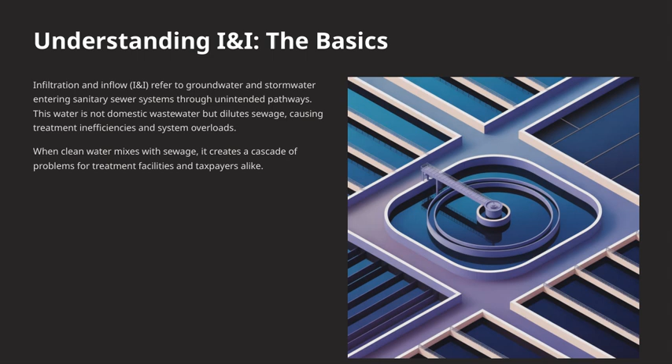Understanding these basic concepts helps us grasp the bigger picture of why managing I&I is crucial for maintaining effective, cost-efficient wastewater treatment and protecting our communities.

Let's take a closer look at the difference between infiltration and inflow, as understanding these is key to managing sewer system issues. Infiltration happens when groundwater seeps into the sewer pipes, usually through cracks, broken joints, or defective manholes. This process occurs continuously, so it's a slow and steady flow of water coming from underground sources.

On the other hand, inflow is quite different. It involves stormwater entering the sewer system through direct connections like sump pumps, roof drains, or uncapped cleanouts. Inflow tends to happen during rain events, leading to event-driven spikes in flow that are rapid and high in volume, and these usually come from surface water sources.

Both infiltration and inflow can significantly increase sewer flow, but they differ in their sources, flow patterns, and how we detect them. Recognizing these differences helps us identify the right solutions to keep our sewer systems functioning efficiently.

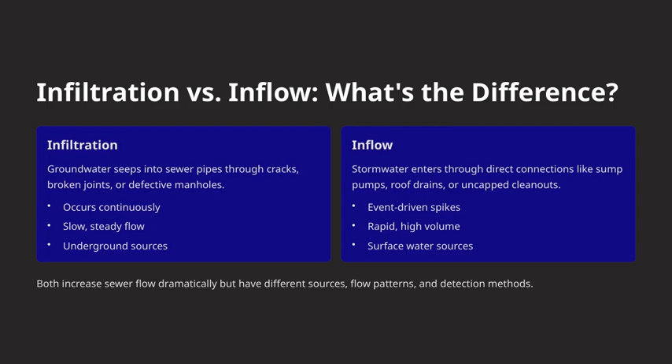So let's talk about how I&I, or inflow and infiltration, actually enters sewer systems. One of the main pathways is through infiltration, which happens when there are cracks in pipes, offset joints, damaged manholes, or deteriorated cleanouts. These are all points where groundwater or surface water can seep into the sewer system, especially if the pipes are old or poorly maintained.

Then there's direct connection I want to highlight. Sometimes, sump pumps or roof drains are illegally tied into the sanitary sewer. These connections aren't meant to be there, and they allow stormwater or groundwater to flow directly into the system, which can cause serious problems down the line.

Lastly, stormwater intrusion occurs through yard drains and downspouts that channel rainfall into the sewer system. Instead of going into the ground or proper stormwater facilities, all that rainwater gets funneled into the sewer, increasing flow and sometimes overwhelming the system.

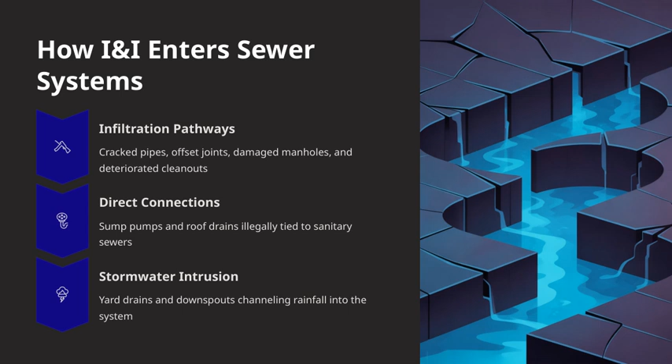Understanding these pathways is crucial because they contribute to system overloads and can lead to issues like overflows or backups. This is why identifying and managing these entry points is so important for maintaining a healthy, efficient sewer system.

Let's talk about why I&I really matters in our wastewater systems. First, treatment inefficiency. When there's too much I&I, it dilutes the sewage, which means the biological treatment processes become less effective. Essentially, the pollutant levels drop below the critical point needed for proper breakdown, making treatment less efficient overall.

Next, system overload is a big concern. Excess I&I can cause sewer pipes and treatment plants to go beyond their designed capacity. This can lead to backups, overflows, and even environmental contamination, which are serious issues for both public health and our ecosystems. And finally, rising costs.

When stormwater and I&I enter the system unnecessarily, it forces us to pump, process, and disinfect a lot of water that shouldn't be there in the first place. This extra work significantly increases treatment costs, putting a strain on resources that could be better used elsewhere.

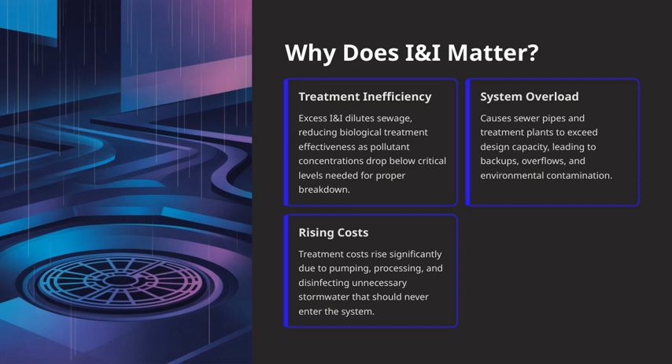So, managing I&I isn't just about system maintenance. It directly impacts efficiency, environmental safety, and costs. That's why it's such a crucial part of our overall strategy.

Let's talk about the real-world impact of sanitary sewer overflows, or SSOs. When heavy rains hit, they cause inflow spikes that can quickly overwhelm even the most well-maintained systems, often within just a few hours. The consequences of these overflows are quite serious.

SSOs release untreated sewage directly into streets, parks, and waterways, which not only creates a mess, but also poses health risks. These pathogens can spread through communities, leading to disease outbreaks. Moreover, our aquatic ecosystems suffer from the toxic loads introduced during these events, harming wildlife and water quality.

The economic impact is also significant. Beach closures and fishing bans hurt local businesses and communities that depend on tourism and recreation.

As an example, many municipalities report that between 60 to 80% of their SSOs are directly linked to inflow and infiltration, what we call I&I, especially during storm events. This highlights how critical it is to manage inflow properly to prevent these damaging overflows.

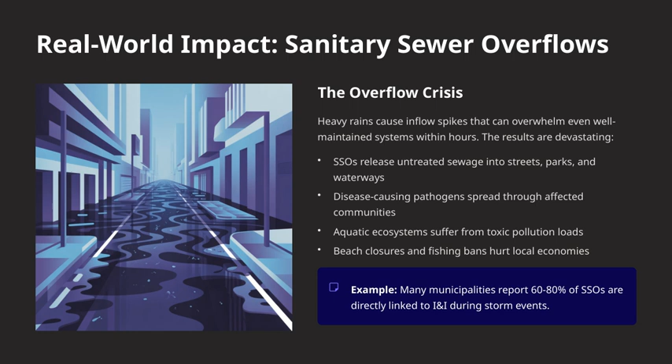Let's take a closer look at some common entry points for inflow and infiltration in our communities. First, deteriorated manholes are a significant issue. When covers become loose and walls crack, they allow large amounts of stormwater to enter the sewer system, especially during heavy rains. Next, illegal sump pumps are another problem. These pumps often divert groundwater directly into sanitary sewers during wet weather, bypassing the intended stormwater management.

Then we have roof drain connections. Sometimes, downspouts are connected to sanitary lines instead of proper storm drains, which can overload the system during storms. Additionally, aging infrastructure plays a major role. Pipes with offset joints or broken sections that are past their service life create gaps where water can seep in.

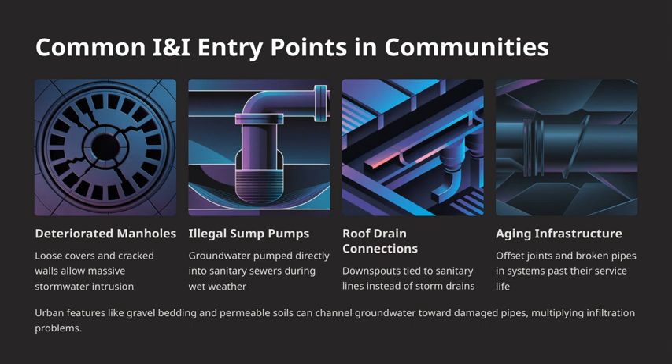It's also important to note that urban features like gravel bedding and permeable soils can actually guide groundwater toward these damaged pipes, increasing infiltration issues. All these factors contribute to the overall stress on our sewer systems and highlight the importance of maintenance and proper infrastructure planning.

Now, let's look at how we can effectively detect and reduce inflow and infiltration, or I&I, in our sewer systems. First, we need to identify the problem areas. Flow monitoring is a key tool here. It helps us pinpoint those sewer sections that see abnormal wet weather increases, indicating where I&I might be entering the system. Next, we move on to field testing. Smoke testing is great for revealing illegal inflow connections, like sump pumps or roof drains that are improperly connected, and dye testing allows us to trace specific sources of inflow directly back to their origins.

Once we've identified trouble spots, we conduct infrastructure inspections. Using CCTV cameras, we can locate pipe defects, cracks, and structural failures that could be contributing to I&I. Then, it's time for repairs. Sealing cracks, replacing damaged pipe sections, capping cleanouts, and disconnecting stormwater drains are all essential steps to reduce inflow and infiltration.

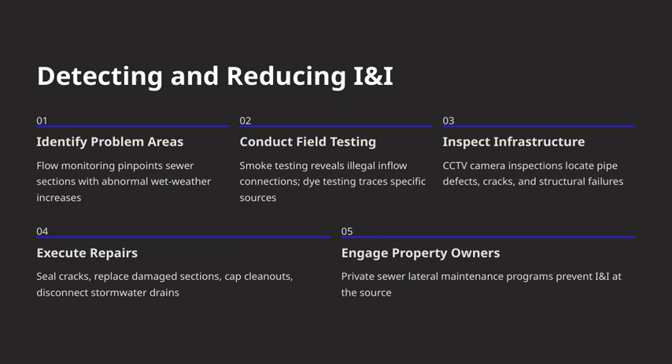Finally, engaging property owners plays a vital role. Private sewer lateral maintenance programs help prevent I&I at its source by encouraging property owners to keep their connections in good condition. Together, these steps form a comprehensive approach to managing I&I effectively and ensuring our sewer systems operate efficiently.

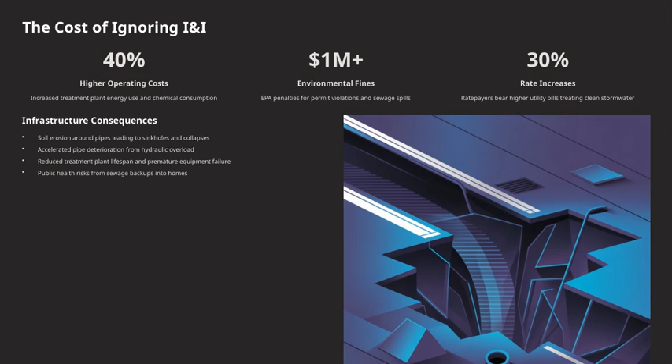And perhaps most concerning, there's a public health risk. Sewage backups into homes can happen when systems are overwhelmed, posing serious health hazards to residents. So, ignoring I&I doesn't just hurt the environment and the system, it directly impacts our costs, infrastructure integrity, and community safety. That's why addressing these issues proactively is so critical to the overall health of our water management systems.

Managing I&I, or inflow and infiltration, is really about protecting our communities and keeping our sewer systems reliable. When we understand how infiltration, water seeping into the system, and inflow, water flowing in from sources like storm drains, work together, we can prevent system failures that could be costly and disruptive.

It's also crucial for protecting the environment. By proactively detecting and repairing leaks and openings, we can reduce overflows that might pollute water bodies. This not only preserves water quality, but also helps safeguard aquatic ecosystems that are vital for our local environment. From a financial perspective, preventing I&I can save communities millions in treatment costs and infrastructure repairs. It's about being smart and proactive, so we don't face bigger expenses down the line.

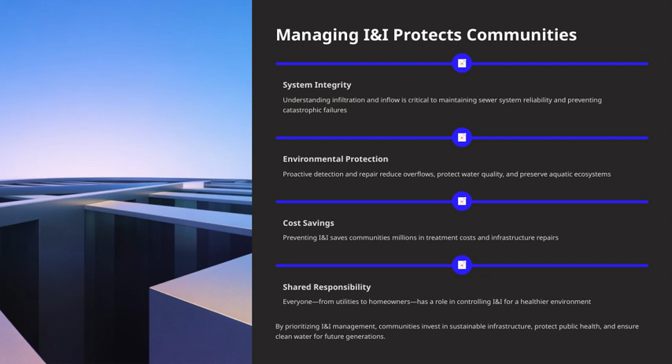And of course, managing I&I isn't just the responsibility of utility companies. Everyone has a role: homeowners, businesses, and local governments alike. When we all work together, we can better control I&I and maintain a healthier environment for everyone. By making I&I management a priority, communities are investing in sustainable infrastructure, protecting public health, and ensuring we have clean water for generations to come. It's about creating a resilient, environmentally friendly future that benefits us all.